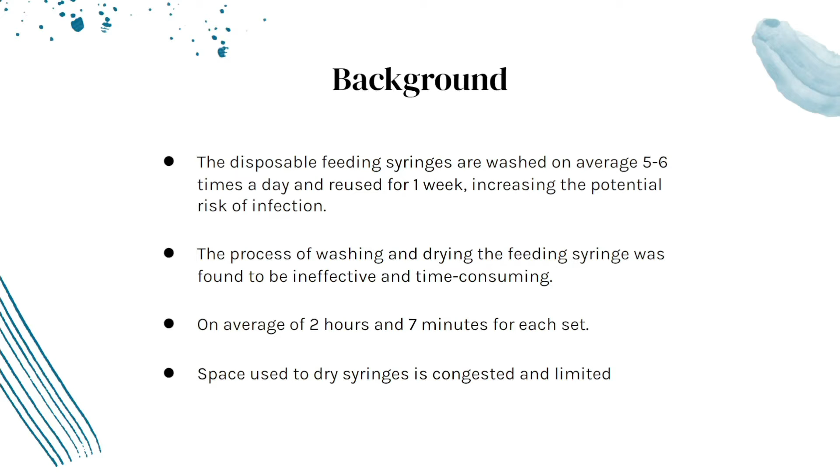One of the few reasons why that is so is due to the allocated area for our nurses to dry the syringe. It is congested and they mainly rely on air drying the syringe, and washing takes up another portion of time, as each nurse has different methods of washing. This is why my team and I decided to come up with an effective and efficient way to wash, dry and sterilize feeding syringes.

So moving on to what we have found. Currently there are a few types of cleaners that can be found in the market. However, they are either made for industrial size washers, or nurses would still have to manually wash and dry the syringe before even putting them in for sterilizing.

Before going into further details of what my team has come up with to tackle our challenge, we came up with 3 factors that we can use to determine what a clean syringe should look like. First and foremost, no visible residue should be seen. Secondly, there should not be any visible moisture. And last but not least, the transparency of the syringe barrel.

Now I will hand over my time to Clement to tell you guys more about our product design.

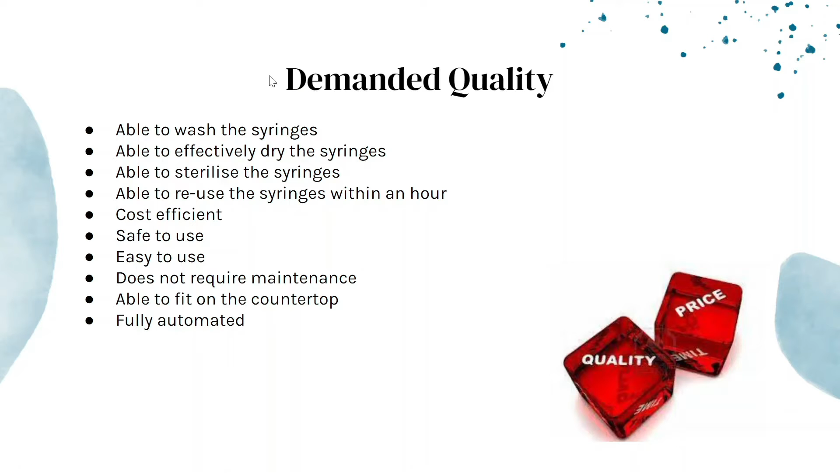Based on the background information, we came up with a list of customer requirements, or the demanded quality. Next, these are the specific functional requirements based on the customer requirements, and those in bold are the constraints from our customer. Take note that the width has to be less than 60 cm so that the product can fit on the countertop.

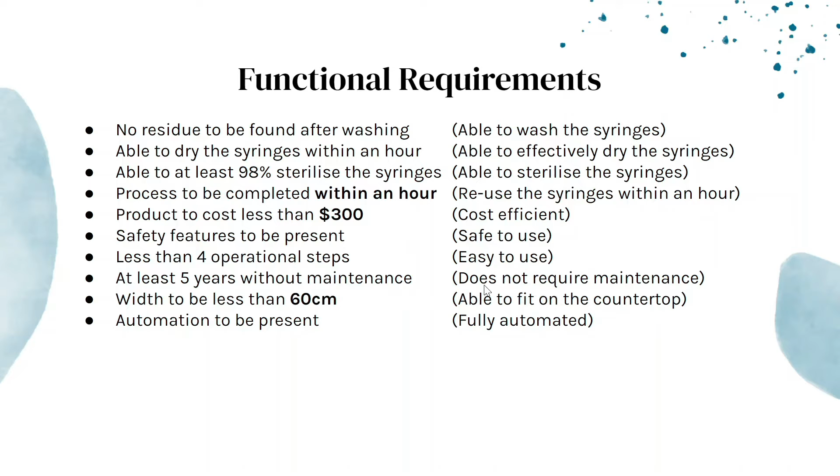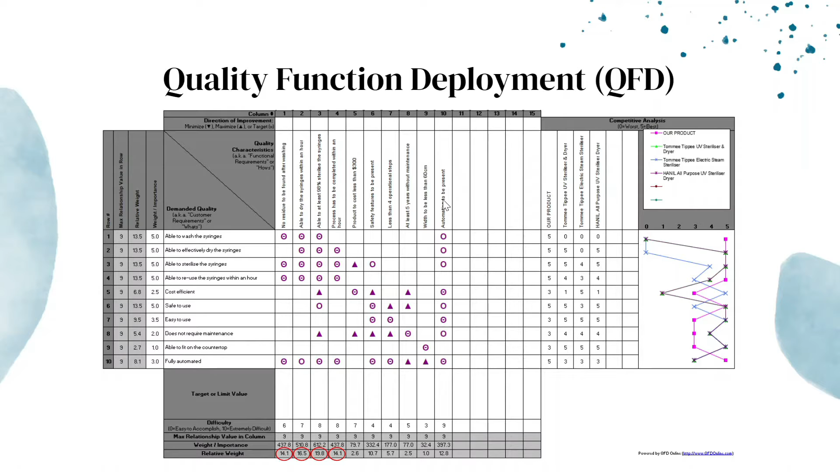These information are then put into the Quality Function Deployment Matrix, the QFD matrix. From the matrix, we identified the product design specifications based on the top few functional requirements with high relative weightage, shown circled in red. Therefore, these are the product design specifications.

Subsequently, from the voice of customer, we came up with a few methods on how to solve what the customer wants: high pressure water and ultrasonic cleaning to wash, fan drying, spin drying and heating element to dry, and steam and UV to sterilize.

For the third concept sketch, it uses ultrasonic cleaning to clean as well, but however it uses steam to sterilize and a heating element and fan to dry.

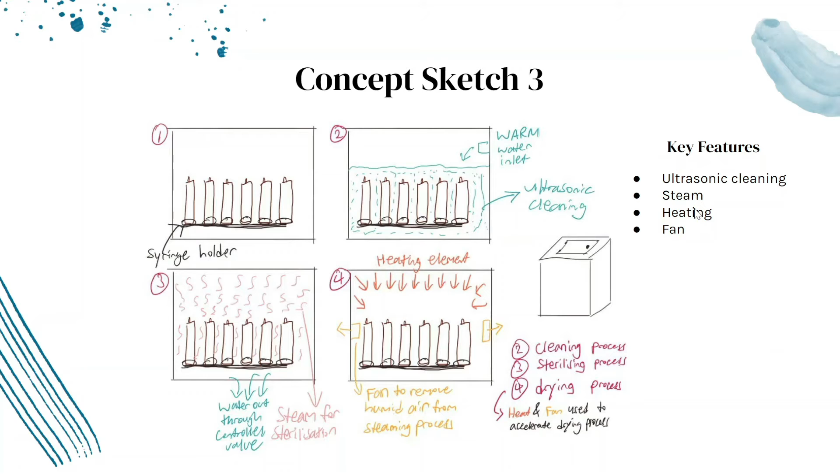For concept sketch 4, the last concept sketch, it uses ultrasonic cleaning to clean, UV light to sterilize and a fan to dry.

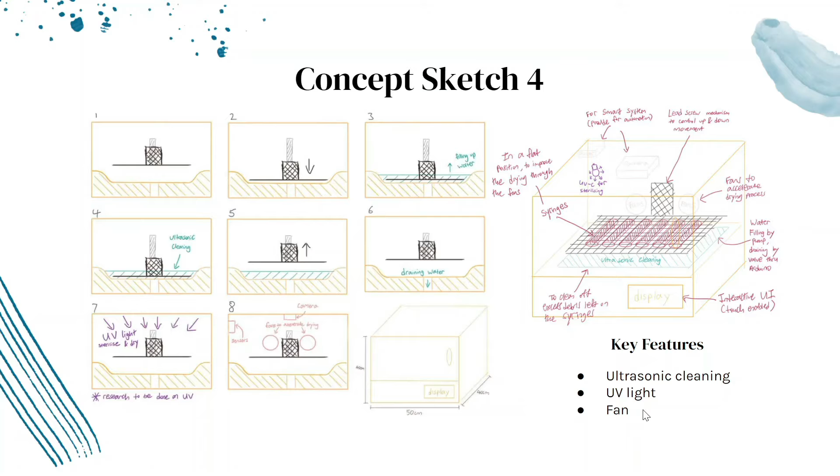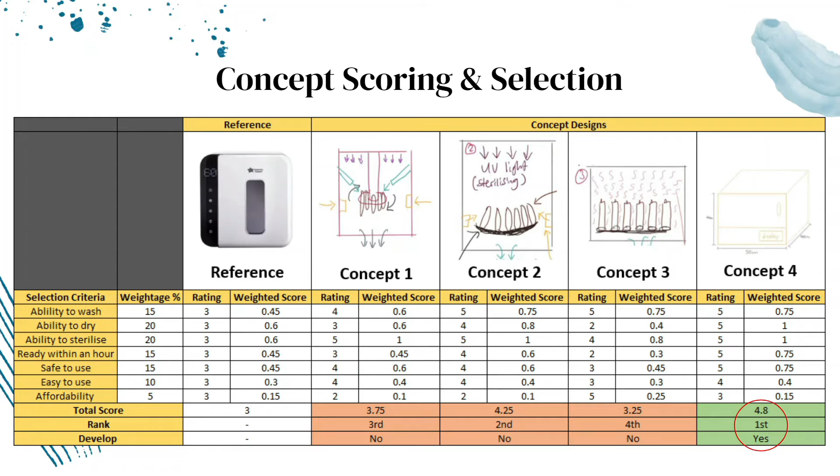The advantages and disadvantages of the washing and sterilization methods were found. From the analysis done, we were able to do the concept scoring and selection. The fourth concept was selected because it has the highest score.

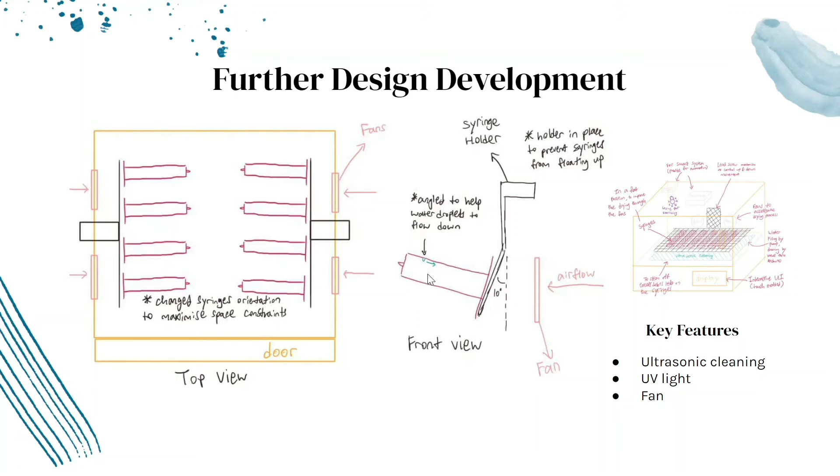Concept design 4 was further developed after the selection matrix. Firstly, the orientation of the syringes have changed to maximize the space constraints. Next, a syringe holder was designed to prevent syringes from floating up when placed in the water. It is also angled at 10 degrees to help water droplets flow down, aiding the drying process.

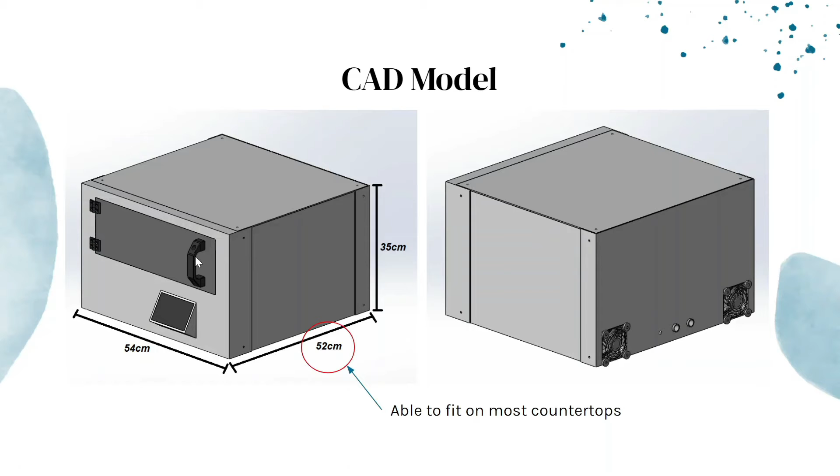There are many components in our model. I'll explain the purpose and functionalities of the key components in the next few slides.

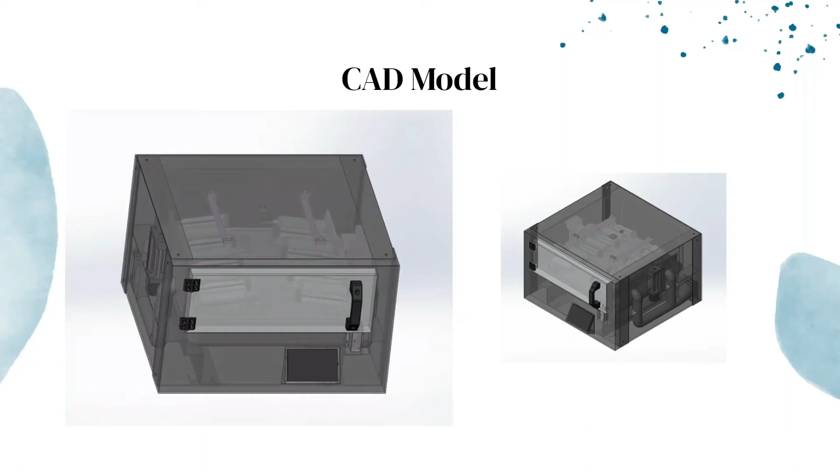Firstly, the door is sealed to prevent ultraviolet rays from escaping. The material of choice is aluminium as it is lightweight and has a high reflectivity for UV.

Next, the display panel is touch enabled and has a smart and user-friendly user interface.

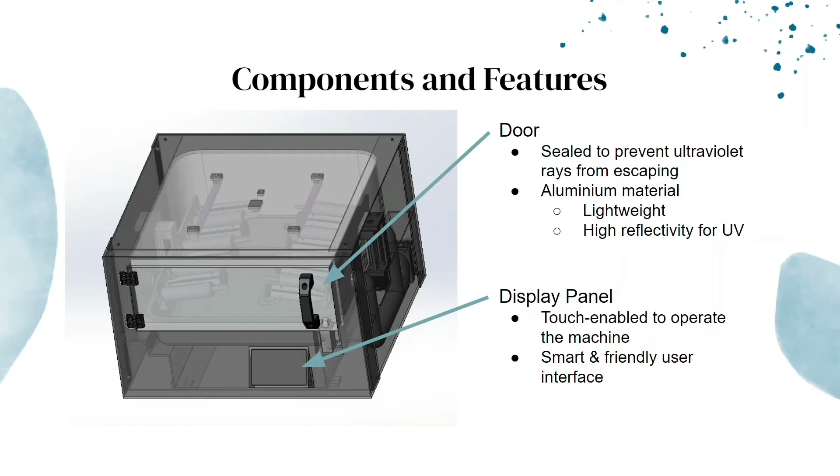Next, the temperature and humidity sensor is used to gather data to determine if the syringes are dry. Also, the smart camera performs machine learning and camera vision to ensure clean and dry syringes.

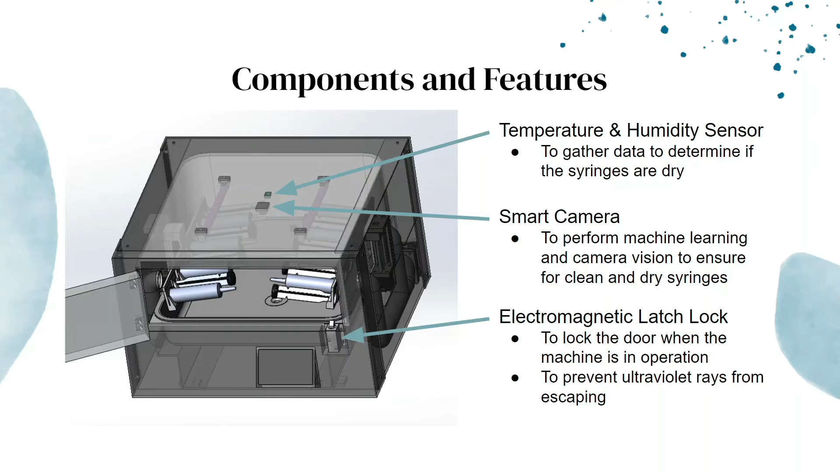There's also an electromagnetic latch lock to ensure that the door is locked when the machine is in operation, preventing ultraviolet rays from escaping.

Next, the enclosure is also made of aluminium material as it is lightweight and has high reflectivity for UV.

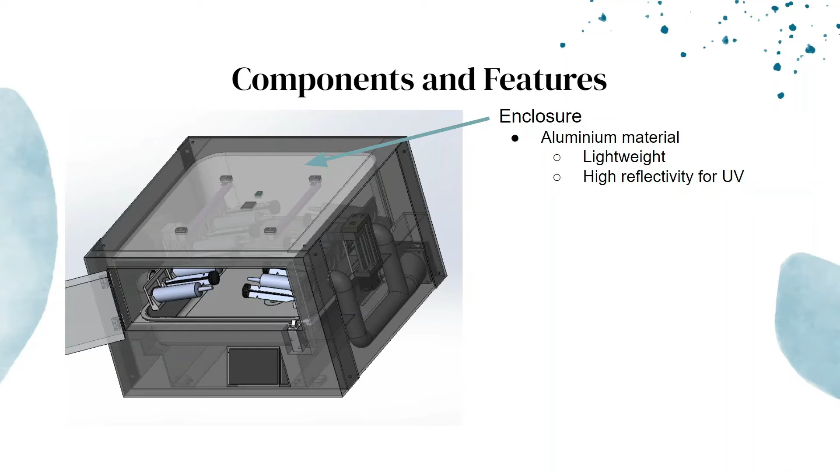Next is the UVC light to sterilize the syringes, as well as the ultrasonic tank, which is made of stainless steel material as it is durable and corrosion resistant.

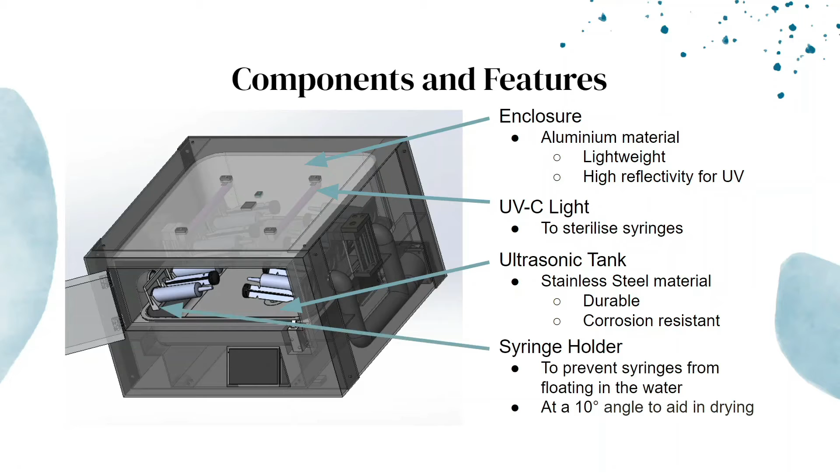The syringe holder is there to prevent syringes from floating in the water. It is also placed at a 10 degrees angle to aid in the drying process.

Next, a lead screw mechanism is used to translate rotational motion to linear motion. The benefits are that it is compact in size, precise, accurate, and has smooth motion.

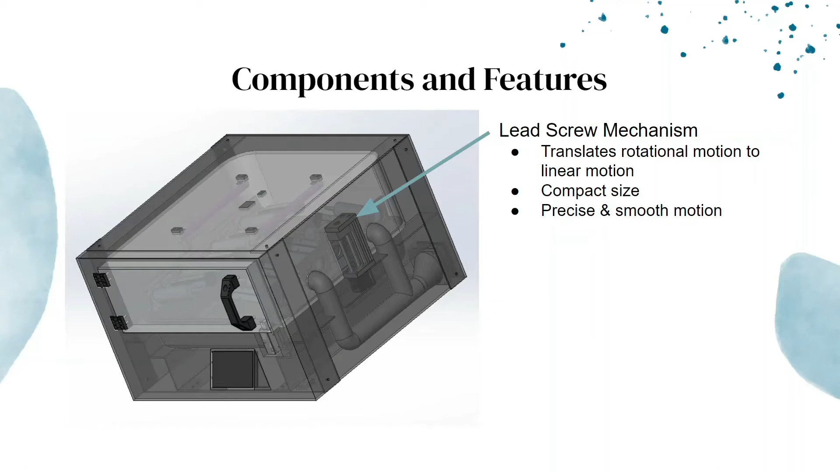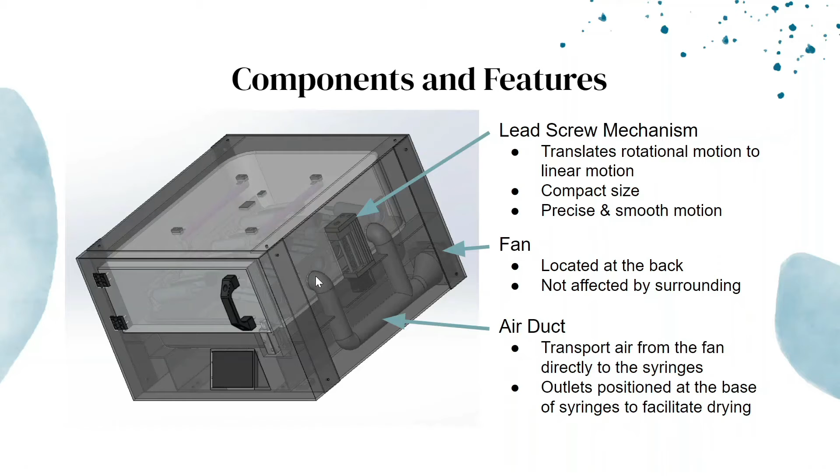Next, the fan is located at the back because it will not be affected by the surrounding at the back. Next, the air duct transports air from the fan directly to the syringes. The outlet of the air duct is placed at the base of the syringe to facilitate the drying process.

Next, the water inflow is connected to a solenoid valve to control the water inflow, as well as the water outflow, which also has a solenoid valve to control it. When the valve is closed, the ultrasonic tank will fill up with water.

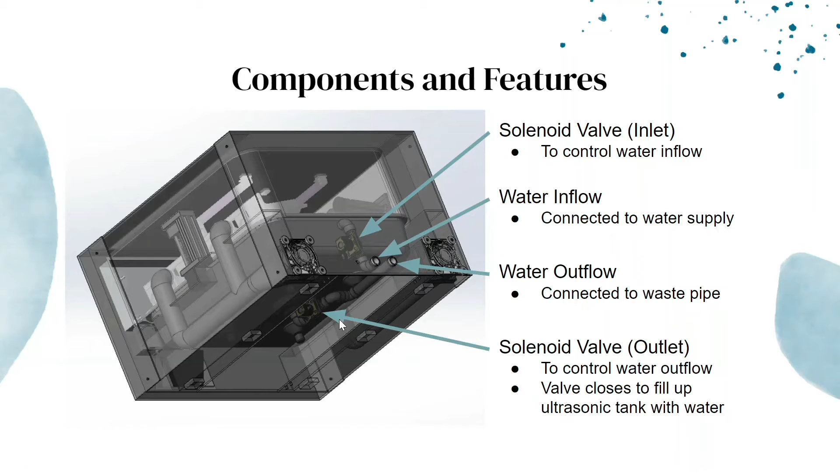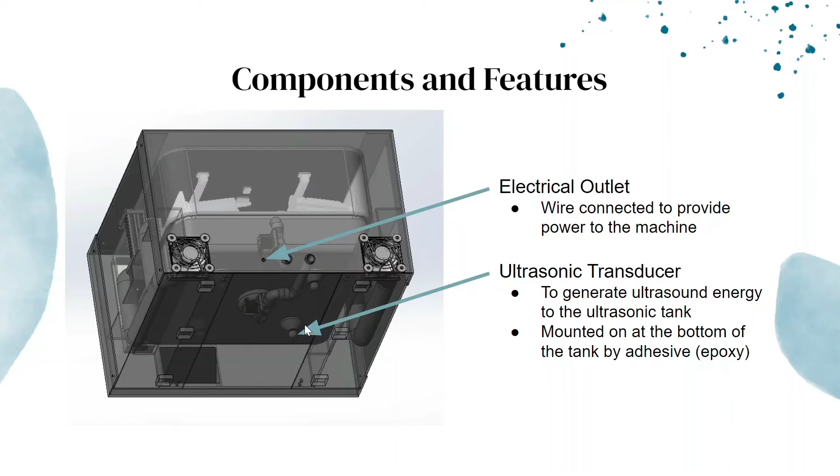Next, the electrical outlet. The wire is connected here to provide power to the machine, as well as the ultrasonic transducer. The transducer is used to generate ultrasound energy to the ultrasonic tank. It is mounted at the bottom of the tank by adhesive.

Next is the syringes. It's placed at a 10 degrees angle to aid in the drying process as seen over here. As well as the location for electronic components will be in these two red boxes.

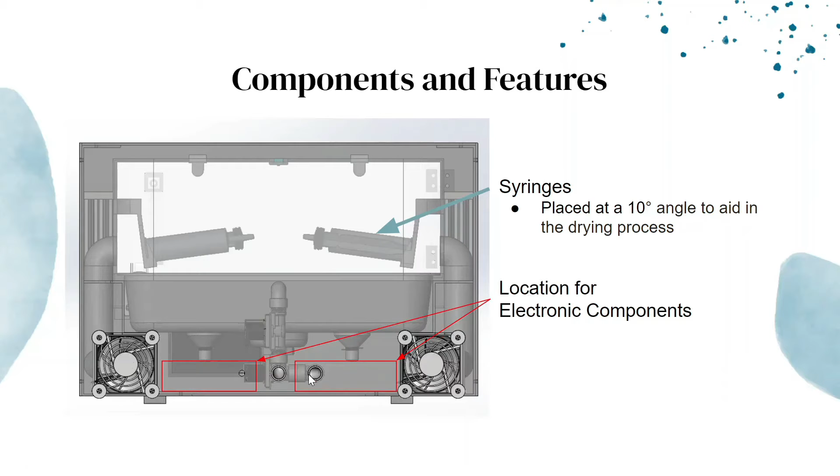This is the exploded view for our model. The image on the right is a close-up version of the image on the left.

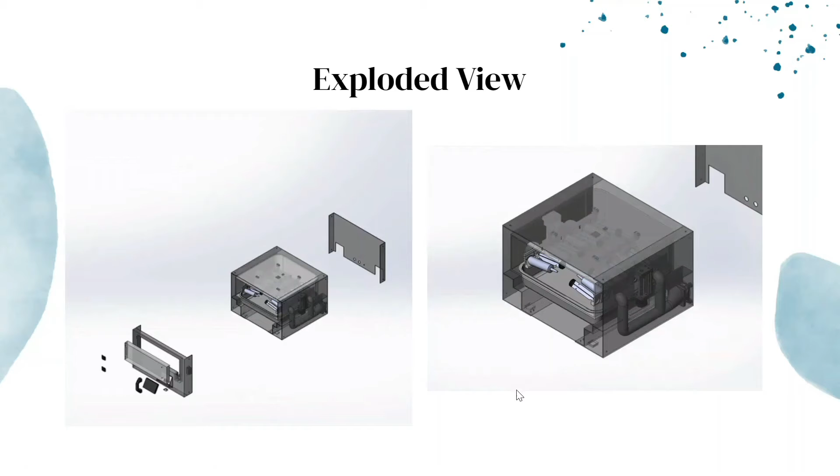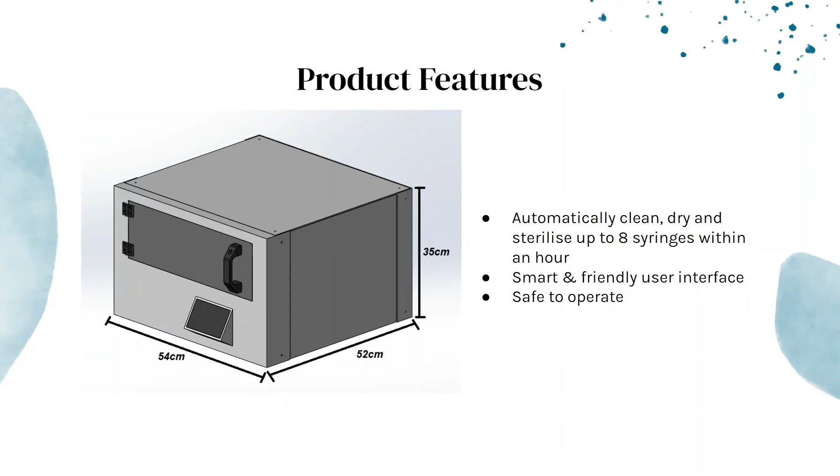The features of our product is that it can automatically clean, dry and sterilize up to 8 syringes within an hour. It is smart and has a friendly user interface and it is safe to operate.

Some of the prototyping that we have done is that we have 3D printed the syringe holder and tested whether it can fit with the syringe and the plunger. We have also done some testing and verification to see the entire process.

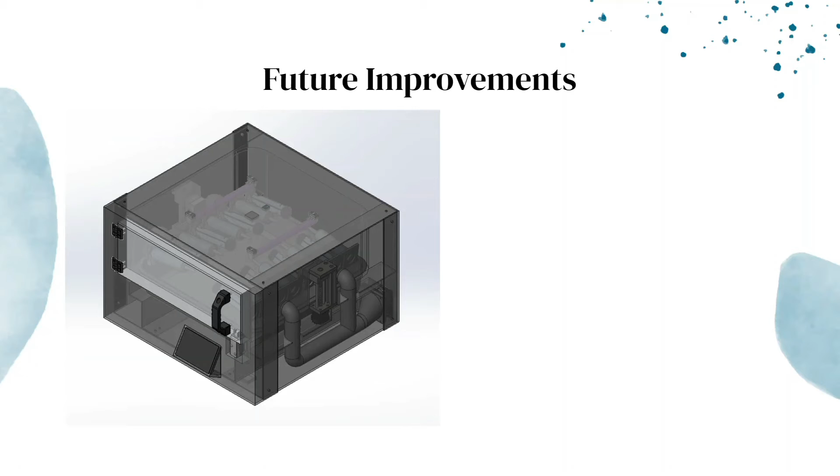Through the testing and verification, some of the improvements we would like to see is firstly, to redesign the door to open from the top instead. This is to improve the ergonomics when placing the syringe into the machine.

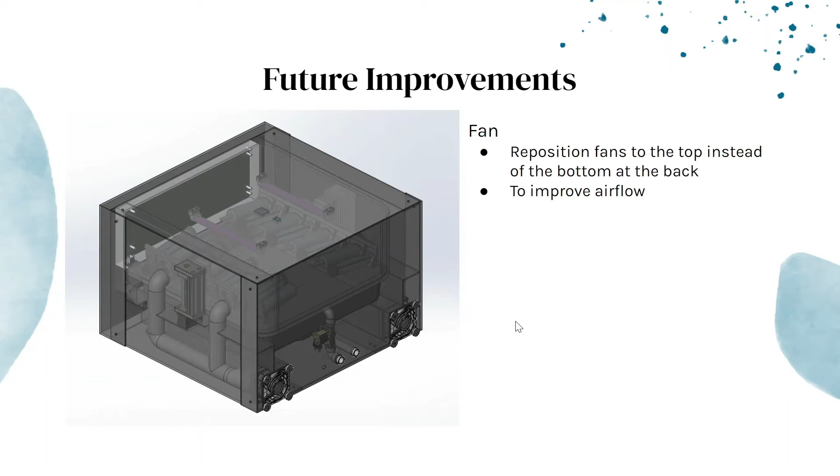Next, to reposition the UVC lights to the walls of the enclosure. Also, to reposition fans to the top instead of the bottom at the back. This is to improve the airflow over here.

Next, the air duct to be repositioned in accordance to the fan as well. And also, to redesign air ducts to transport air supply directly to each syringe as well.

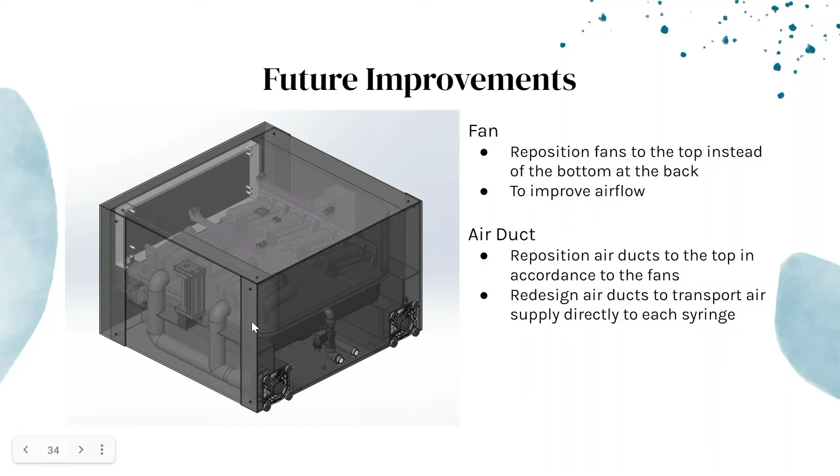Lastly, the placement of the syringes may trap air due to the 10 degrees angle. Some of the possible solutions is to redesign either the syringe holder or the water inlet system to remove the air trapped. Further testing has to be done.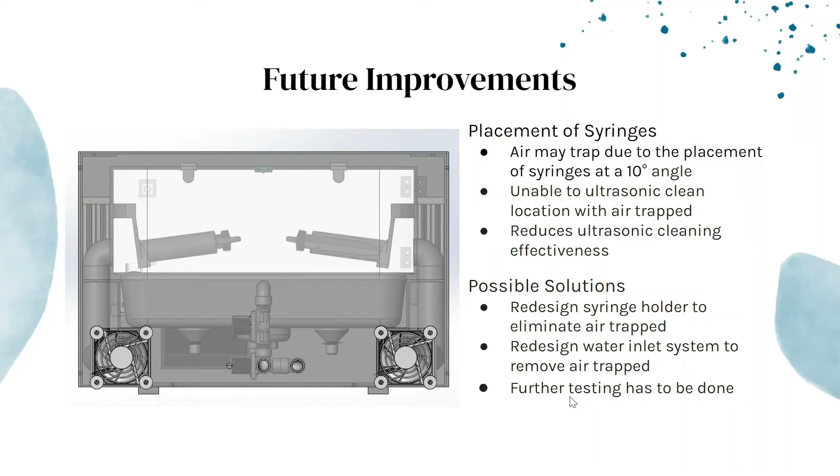Thank you, Clement. Firstly, I will talk about the electrical component selection. It will be separated into components for washing, drying, and sterilizing, as well as other essential components.

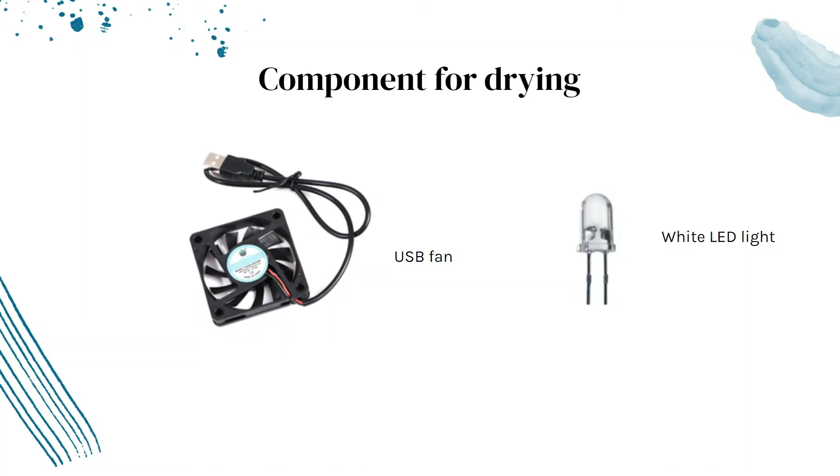For component used for drying includes USB fans to fasten the drying process and also LED light for camera module to see the syringe. The component for sterilizing is an LED light strip which acts as a UV light in this project.

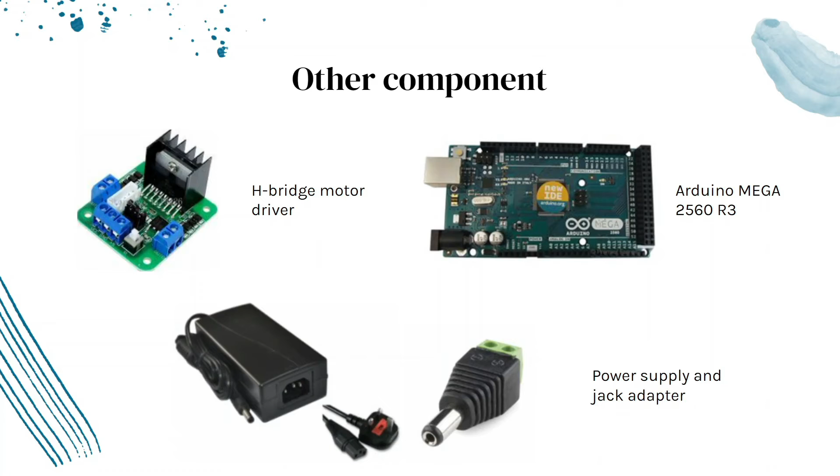Other components include a motor driver which controls the direction of motor movement, and an Arduino Mega to control the whole process flow, and lastly, the power supply and jack adapter to supply 12 volts to the system.

This is the flow of the system. Firstly, its motor rotates to move the tray down, then it follows by closing the valve. The pump will then pump water in and turns off after the tank is filled.

The ultrasonic cleaner then turns on for cleaning. After it's done, it will be turned off and the valve will open to drain the water.

Then followed by the fan and the LED light to turn on during the drying process. After the syringe is dry, the LED and fan will turn off and the LED light strip will turn on for sterilizing. At the end of the process, the LED strip will be turned off.

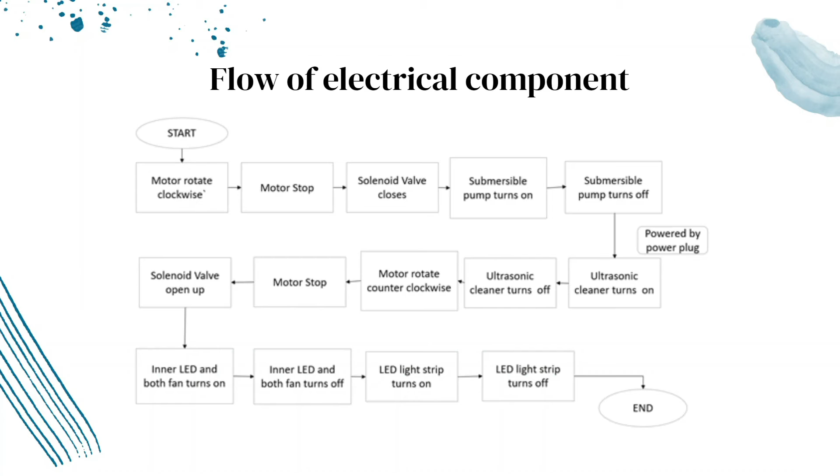The circuitry drawing is shown on the left, and the pins connected to each component is shown in the table on the right. Most components use a transistor for control purposes, as there is only the power and ground wire on the component. The motor is connected to pin 2 and 3, and the fan is connected to pin 4 and 5.

LED strip is connected to pin 6, and the pump is connected to pin 8, and valve to pin 9. Lastly, the LED is connected to pin 12.

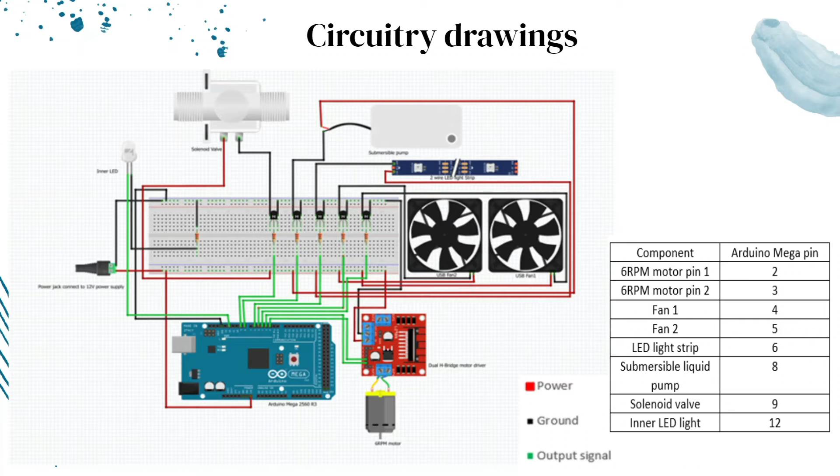The schematic shows the connection of all components. This schematic will be useful in knowing how everything is connected and could help reduce costs in production, where everything can be connected to a PCB board.

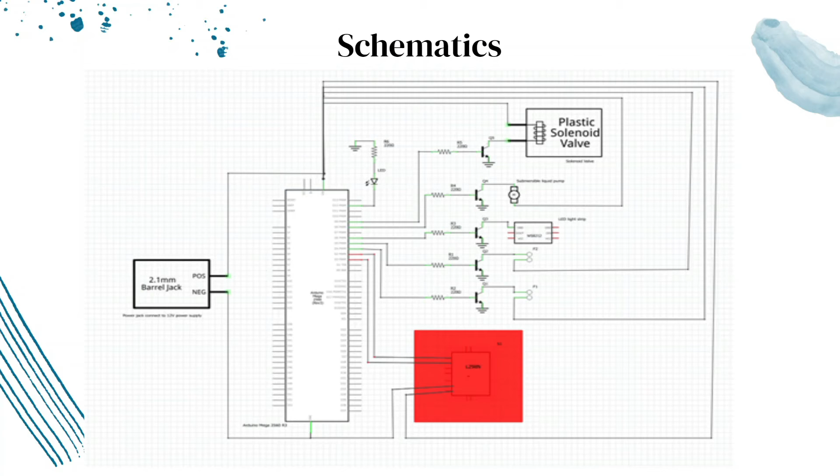As for the budget overview, with all the electrical components used for the prototype, it is estimated to be 228 Singapore dollars. However, from the electronics perspective, the Arduino Mega could be replaced with an ATmega2560 chip and PCB board.

This would reduce the cost by approximately 60 Singapore dollars, which helps reduce the cost by a good 30%.

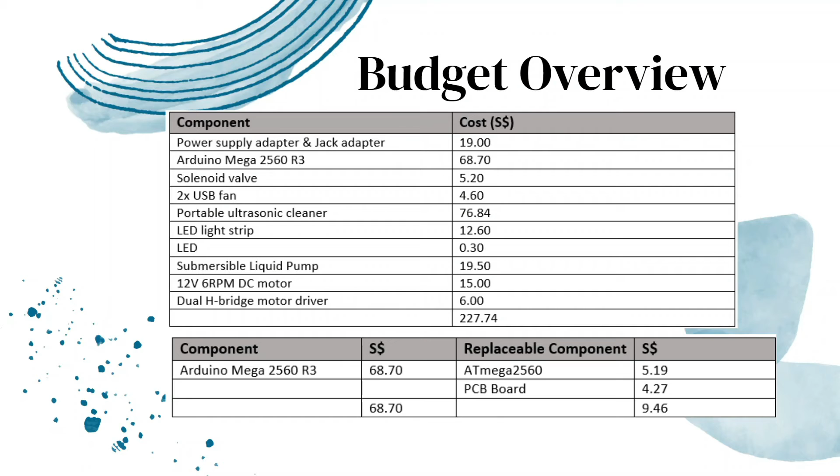Next, I will pass the time to Hui Jie to talk about the software requirement. Thank you, Shenji, for talking about the product components. I will be proceeding to the software requirements.

These are some of the non-functional requirements that we are trying to focus on to value add our products. Firstly, we want 95% of users to not have any difficulty using our user interface. Next, the delay of proceeding to the next screen should be within 1 second. And lastly, the camera should be able to detect 99% of the syringe being dry.

For software specification, we will be using Python 3.8, Tkinter for our GUI, Raspberry Pi OS for the communication with Arduino, and lastly, TensorFlow Lite for machine learning with OpenCV.

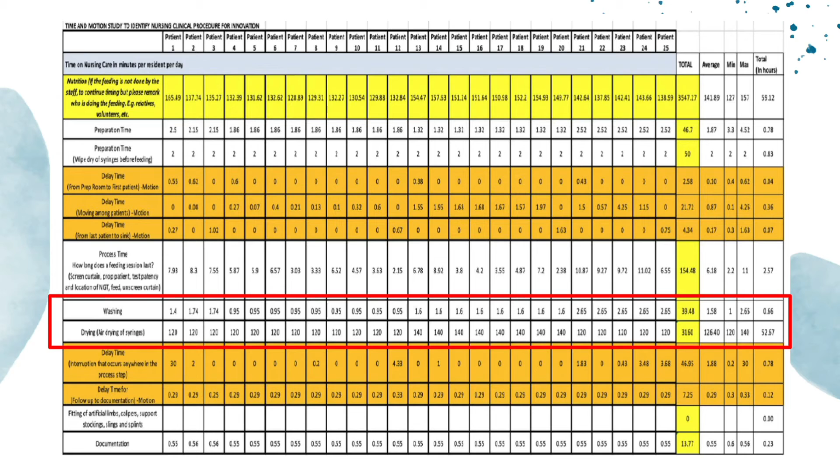As you can see from this image, the drying of the syringe actually took between 120 to 140 minutes. How do we ensure the syringe is being dry throughout the process? I could have set a timer of 120 minutes for the syringe to dry.

However, within the 120 minutes or after the 120 minutes, the syringe might not be even dry. And if I were to set a timer of 140 minutes, the syringe can be dry. However, it might be very time consuming.

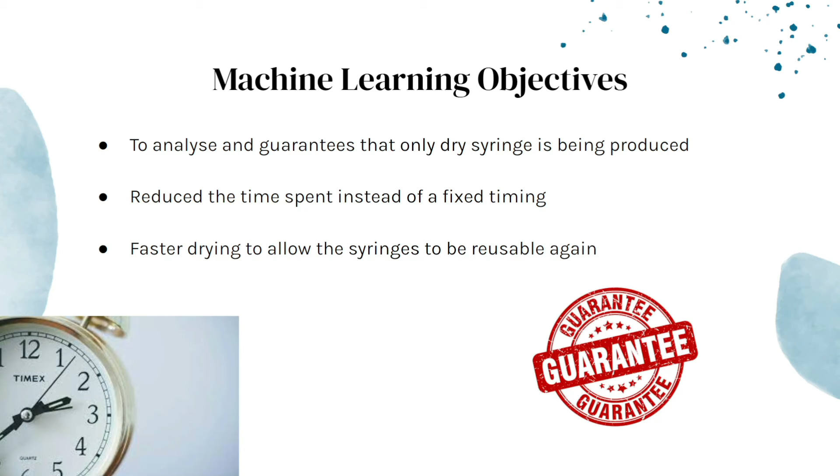With machine learning, we want to analyze and guarantee that only dry syringes are produced. We would also like to focus on the time spent drying the syringe and give an estimated time instead of a fixed time. The faster the drying, the more syringes the nurses will be able to reuse. These are some of the classifications we are trying to focus on.

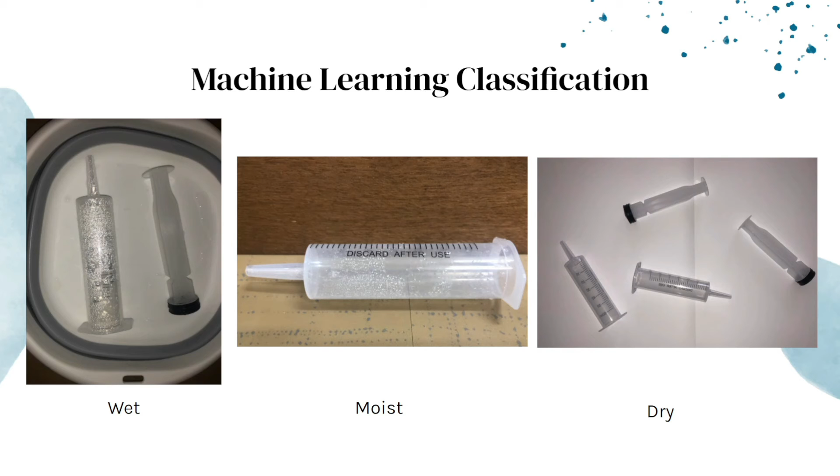Firstly, wet, where the water vapor in the syringe is very visible. Next, moist, where the syringe is partially dry. And lastly, dry, where the barrels are actually transparent.

Next, I'll pass my time to Chinkiat to talk more about the final user interface. Thank you, Hui Jie. Now I'll be talking about our final user interface. We built it to be easy to understand and simple to use without the need of any training. This interface will be displayed on the 5-inch touch screen attached to the Raspberry Pi.

This is done by lowering the syringes into the water and starting the ultrasonic cleaner. It will also show a countdown timer, fixed to 15 minutes for this phase. Once this timer runs out, you move on to the next phase.

In step 3 is the drying phase, and the timer for this actually varies, because our computer vision will detect if the syringes are dry or not. So if the syringes are still wet and the time is about to run out, our interface will increase the estimated time so that the syringes have more time to dry.

Our goal for this is to hit approximately 40 minutes for drying. Once that part is done, you move on to step number 4, where the syringes will be subjected to UV light and be sterilized.

For this phase, we also have a fixed time of 5 minutes, which brings the whole process to approximately an hour. Once that 5 minutes is up, you move on to the final step, where you tell the nurses that the syringes are ready for collection. Once the nurses press the collect button, the machine resets back to step number 1.

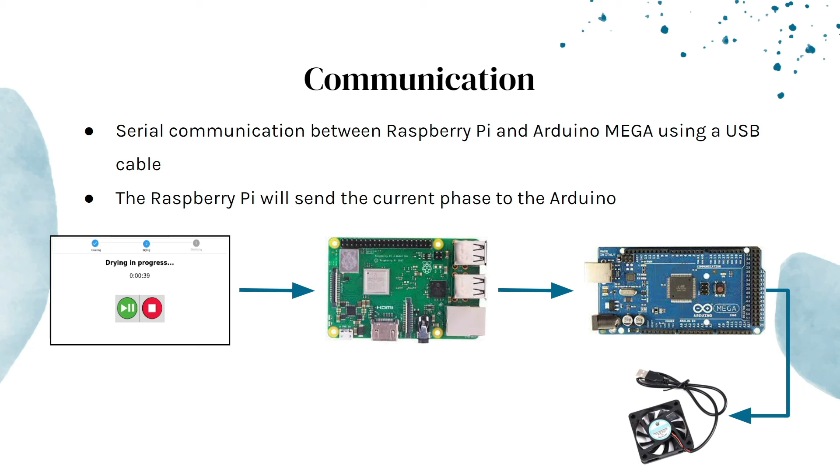Now we'll be moving on to the demonstration. Enjoy the video.